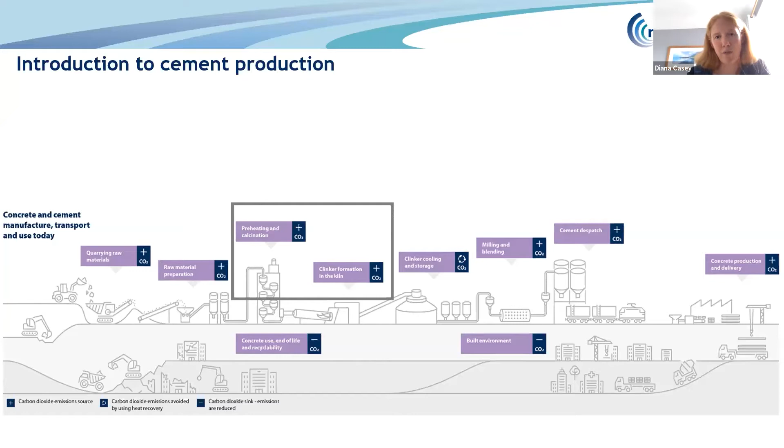The calciner and the kiln are where the majority of the fuels are consumed and where the majority of carbon dioxide emissions are produced. In cement production, 30% of the emissions arise from the combustion of fuels, with the remaining 70% coming from the breakdown of the calcium carbonate or limestone raw materials.

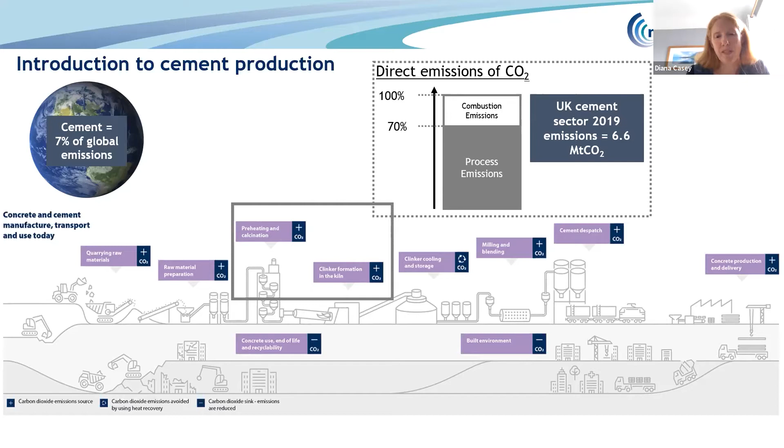Now, you often hear that globally, the cement sector contributes 7% of emissions. However, at UK level, cement production contributes just 1.5% to emissions. I'm going to come on to why that is in a bit.

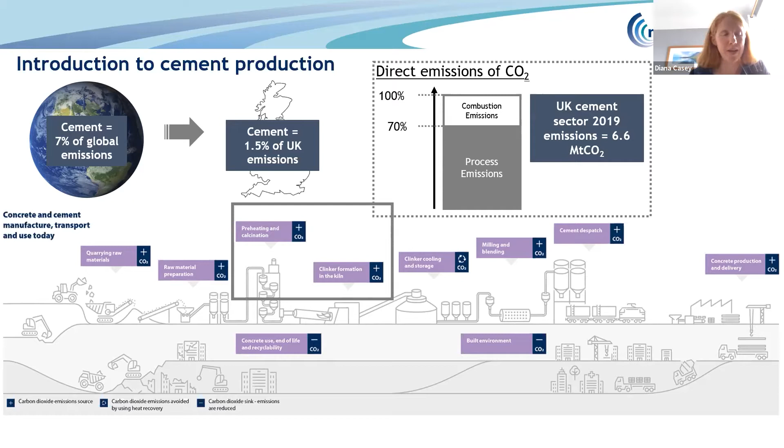Traditionally, cement manufacturers relied on coal to reach the volcanic temperatures required. However, multi-million-pound investments have been made by UK manufacturers to switch away from coal. In 2020, 47% of the thermal input to UK kilns was provided by waste-derived fuels, and this totaled 600,000 tonnes of waste. So across the sector, we use around 14 different fuels now, and I've listed the main ones here.

So we still do use a few fossil fuels - coal, petcoke, gas oil, and natural gas. But then we've got some waste-derived fossil fuels in the form of waste solvents and plastics. And then we've got waste-derived 100% biomass and part biomass fuels. So tyres and refuse-derived fuel are kind of part biomass fuels. And then we've got sludges and wood and meat and bone meal - that's quite a small proportion now, which is 100% biomass.

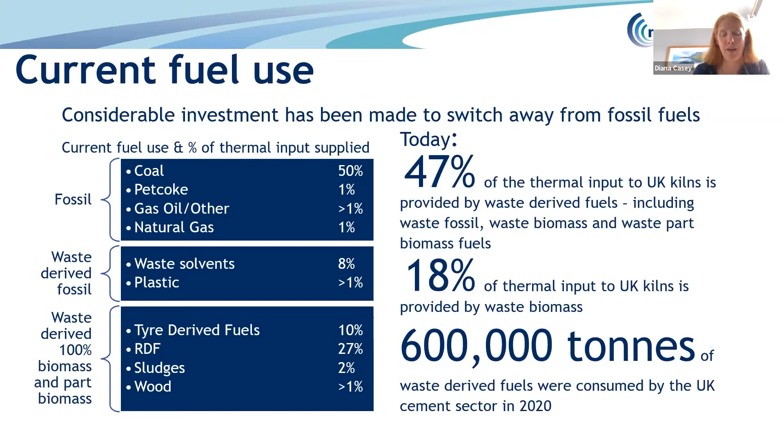Now, a key point on the use of fuels in cement manufacture is that the ash that remains once the fuels have been combusted forms part of the mineral content of cement. In other words, it's recycled into the cement product and doesn't form a waste residue that you have to dispose of after. This makes cement co-processing, as we call it, distinct from other combustion processes like power generation, energy from waste, incineration and biomass boilers.

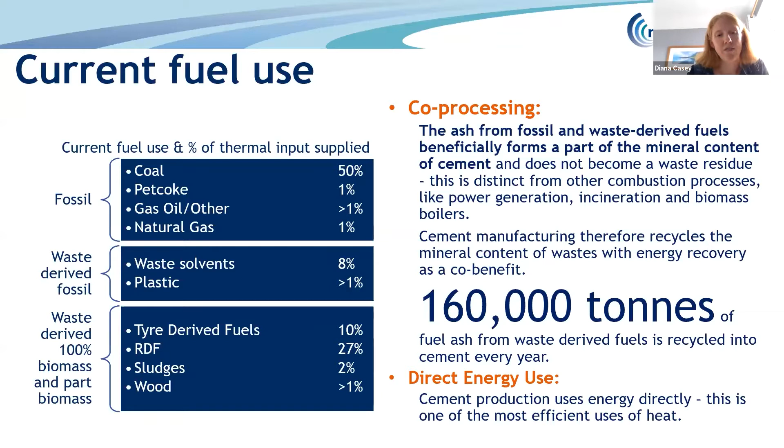And it's also important when we start looking at fuel switching, because the mineral content of the fuels reduces the raw material requirement, and changes in the fuel mix can impact the quality of that clinker because the ash is remaining in the product. Each year, around 160,000 tonnes of fuel ash is recycled into cement.

So that's a bit of background to MPA and cement manufacture. Now I'm going to move on to look a bit at decarbonisation ambition. For some time, the UK has been a step ahead of other nations in terms of decarbonisation ambition.

In 2008, the UK became the first country to legislate for a carbon reduction target through the Climate Change Act. The target set at the time was an 80% reduction by 2050 on 1990 levels. In 2013, MPA published a strategy setting out how the cement sector could meet that 80% ambition.

Today, the UK's climate ambition is net zero, to be net zero by 2050. This is consistent with the temperature target set in the Paris Agreement to limit global warming to well below 2 degrees and preferably to 1.5 degrees Celsius compared to pre-industrial levels.

To get the UK on the net zero trajectory, the Climate Change Committee advised that UK greenhouse gas emissions reduction needs to be strengthened to a 78% reduction by 2035 from the 1990 baseline. In other words, they're saying that to get to net zero by 2050, we need to be at least at a 78% reduction by 2035.

So at the national level, we know where we're heading. As we approach COP26, there will be further announcements enabling the net zero transition. This has already started with publication of the 10-point plan, the energy white paper, the industrial decarbonisation strategy, the Treasury net zero review, and we're waiting on several others as well. So yeah, there's quite a lot going on.

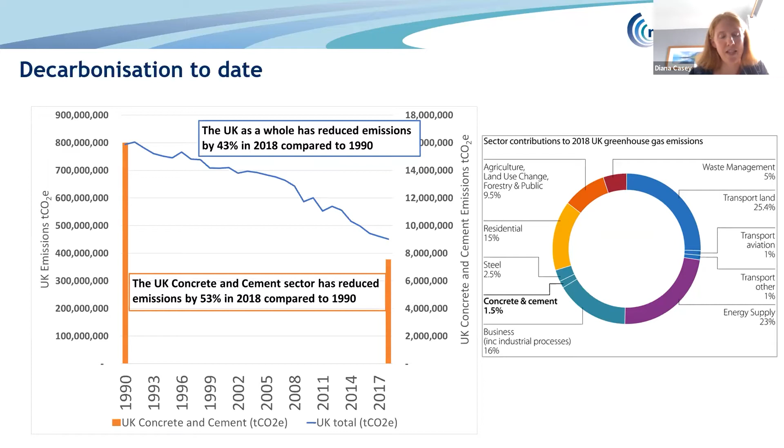This roadmap represents quite a significant milestone for the cement and concrete sector, as it clearly sets out how we can contribute and go beyond net zero by 2050. But more importantly, almost, it sets out what is needed to get us there, not just from government, but also from the industry itself and from other stakeholders.

I guess the only thing here is it's quite important to recognise that this is just one possible route to get to net zero. As some technologies develop, we might learn more about their potential contribution. And it might be that other things come along, or that electricity becomes so expensive, for example, that electrification is completely out of the picture, and we do something different. But this is one credible route to show we can get there.

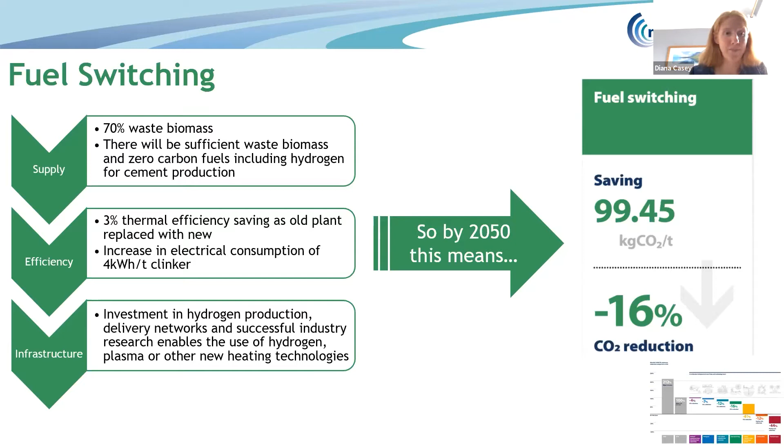Back in 2019, we successfully applied for around £250,000 of funding from the Department for Business, Energy and Industrial Strategy, or BEIS, to undertake a desktop feasibility study into fuel switching in cement manufacture. Now, it wasn't just an MPA study, there were some other partners involved in the work. These were CINAR and VDZ, and of course, the funding came from BEIS.

MPA's key role was to project manage the study, and we contributed technical and commercial oversight, provided UK-specific data, interpreted some of the results, and summarised the outcomes and communicated those results to the UK cement manufacturers and the concrete supply chain.

CINAR were quite important. They developed a unique computational tool known as PKD-MICFD - Process Knowledge-Driven Mineral Interactive Computational Fluid Dynamics. I'll probably just refer to it as CFD modelling, as that's the easiest way to describe it.

Basically, it's a tool that can track and monitor the progress of combustion and its location for not only multiple fuels at the same time, but for as many size fractions of any fuel particles as you want, and how they interact with the raw material feed. In other words, it very cleverly models what happens in a cement plant. I'm going to show you some of the results it provided for this project in a minute.

VDZ is the German Cement Association. It's a little bit like MPA, but it has quite a renowned and internationally acknowledged scientific institution to it. They've got considerable research capabilities and provide services to cement producers across the world. In this project, VDZ contributed their expertise on the cement process. They undertook things like the literature review and helped interpret some of the modelling. They also did some of the techno-economic analysis for the project.

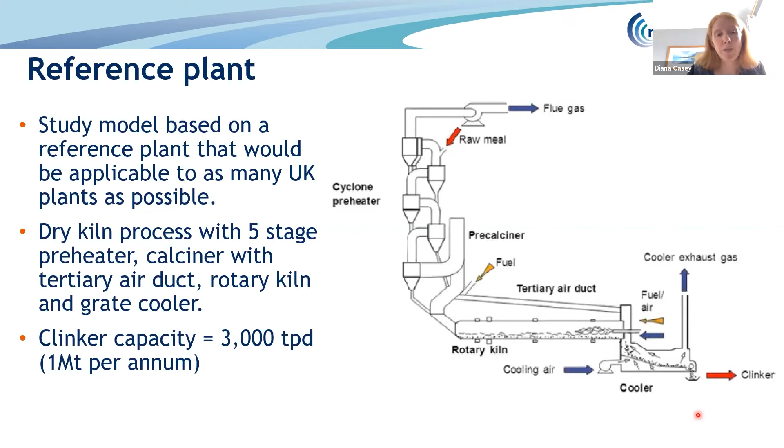It was chosen as a plant with a size or capacity of 3,000 tonnes per day of clinker, which equates to around about 1 million tonnes per year.

Still on the reference plant, this image shows the geometry of the main burner used. The kiln is assumed to be 57 metres long with a radius of 3.64 metres. The burner is a multi-channel burner, which essentially means you can use it to fire different fuels into the kiln. There's lots of technical things it does as well that I don't fully understand, relating to how the air swirls to make sure the fuels burn efficiently. I'm not even going to pretend to understand - it's very complicated. It helps those fuels burn efficiently and in the way required for clinker production.

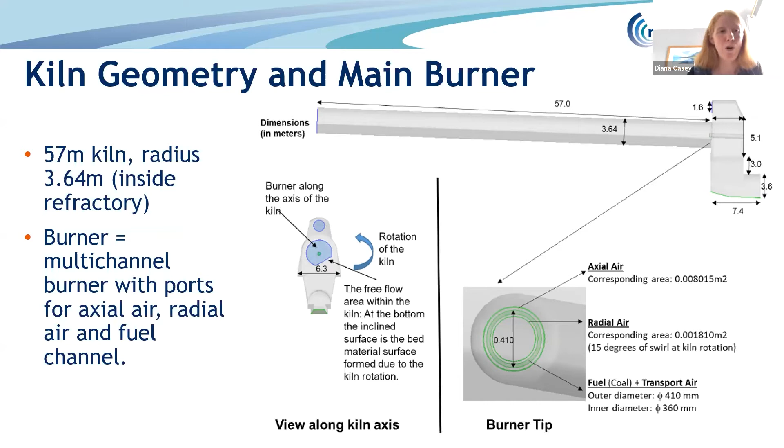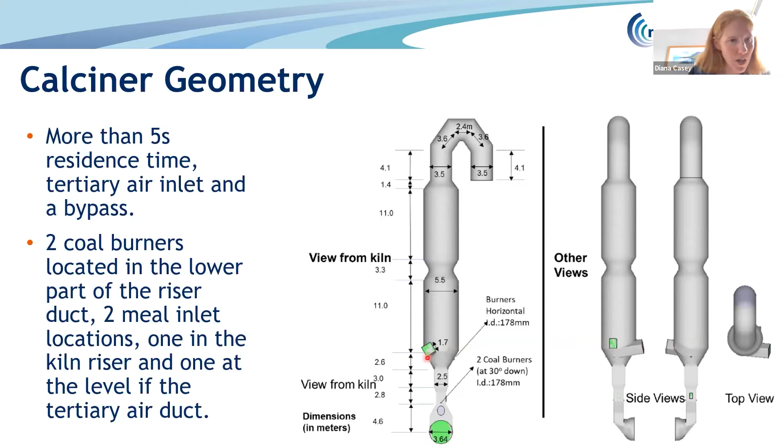And this is the calciner. The residence time, or the length of time the material remains in there - either combusting in the case of the fuel or calcining in the case of the raw meal - is more than 5 seconds. The tertiary air inlet is this square green patch here, which is quite important, I'll come on to why in a bit. There are various places you can input the fuel, and there are 2 meal inlet locations, which are down here somewhere, I think.

In terms of fuel selection, the project team used experience of the manufacturing process, along with knowledge of fuel availability, to propose a fuel mix of 70% biomass, 20% hydrogen and 10% plasma.

Plasma energy is a complete unknown for cement manufacture, and therefore presents a more challenging technology. As a result, it was selected to contribute a smaller fraction of the heat required, particularly in the calciner, and several different options for its use were proposed. Plasma is used in things like waste treatment, so we knew it's possible to use it, but it's never been used in a cement environment, which is quite alkaline and quite dusty. So we don't know how the plasma burners themselves could withstand that. It was quite an interesting thing to propose.

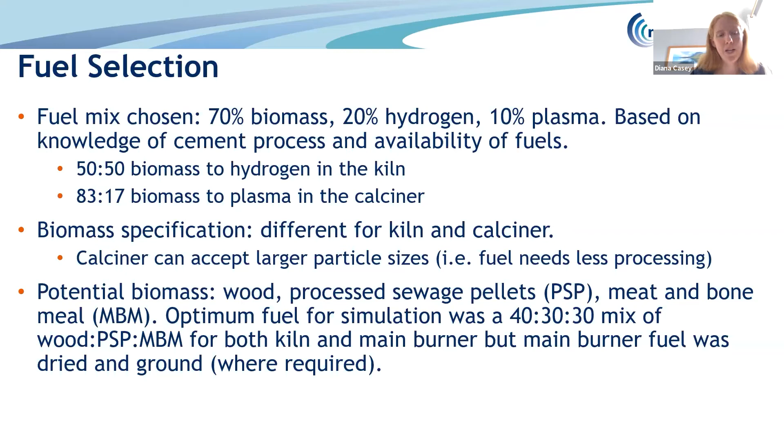For the biomass, fuels with different physical properties were chosen for firing at the kiln and for the calciner. The reason for this difference is that the calciner is able to accept larger particle sizes or chips that require less processing effort, making them cheaper and easier to access. The biomass chosen was a 40-30-30 mix of wood, processed sewage pellets and meat and bone meal. That mix was the same for the calciner and the main burner, but the fuel for the main burner was further dried and ground before use.

This diagram shows different scenarios that were modelled. For both the kiln and the calciner, there was a baseline scenario using 100% coal. For the kiln, there was just one scenario: a 50% hydrogen, 50% biomass mix. For the calciner, we used a ratio of 83% biomass to 17% plasma, but the unknown quantity of that plasma meant that 3 different options were put forward for how it was used to inject heat into the calciner.

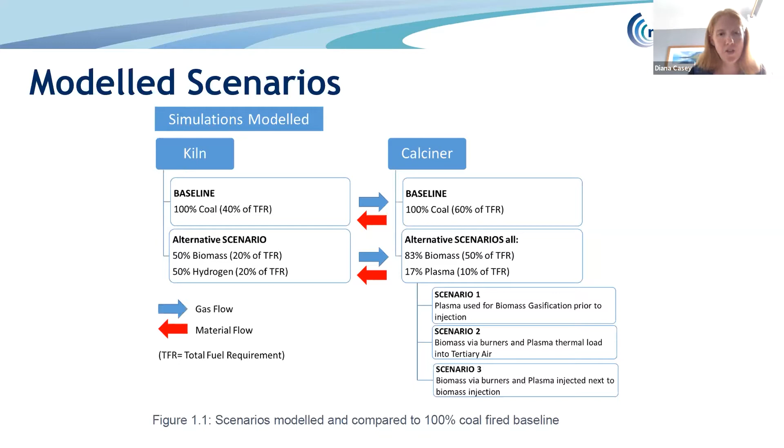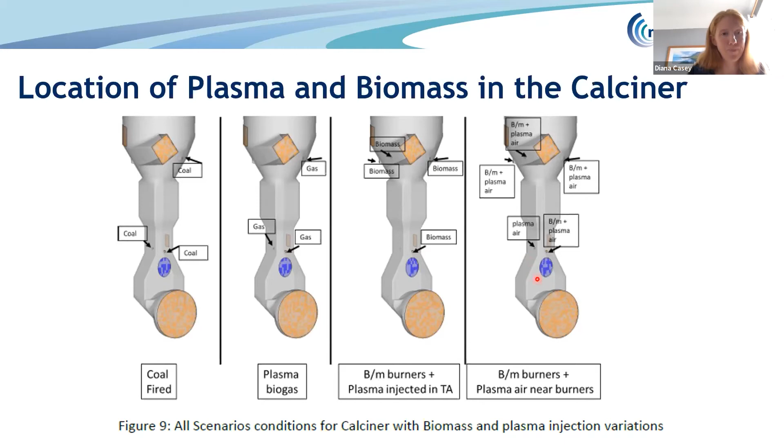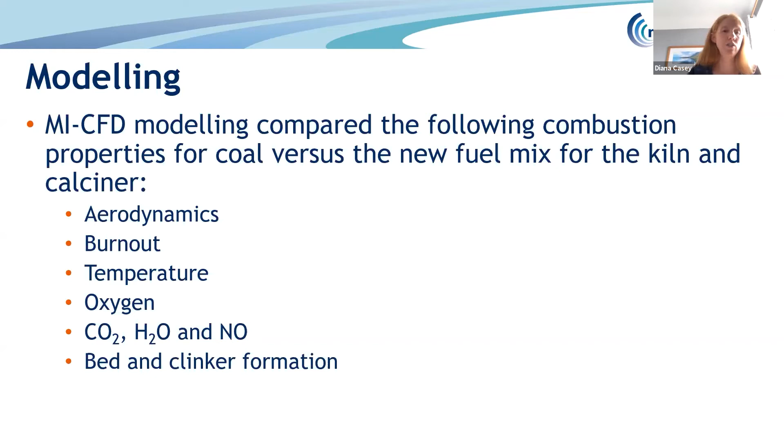The CFD modelling looked at a number of properties, including aerodynamics, burnout of the fuel, the temperatures reached, oxygen content, carbon dioxide emitted, water, NOx, and bed and clinker formation. I'm not going to present results on every single one, otherwise we might be here all afternoon, but I've picked a few just to show what the modelling does, which I think is quite interesting, along with some of the interesting results, to give a bit of an overview.

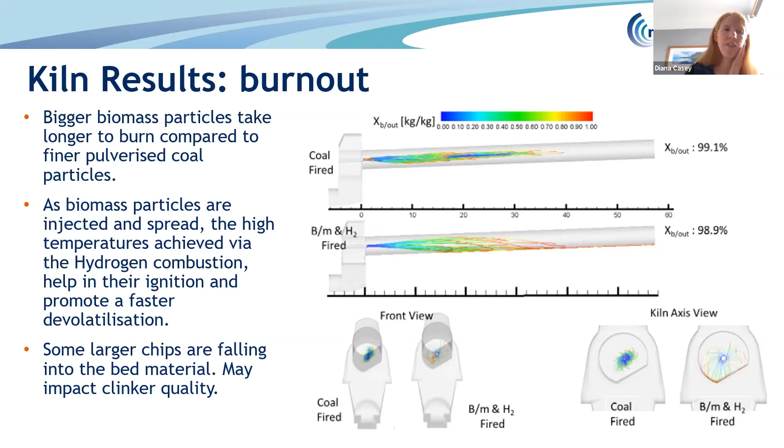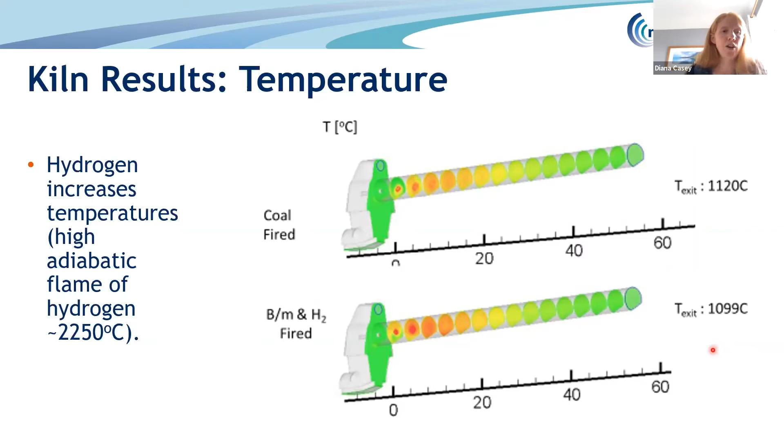These images are now looking at the difference in temperature for the two situations. The red sections are the higher temperature. You can see in this bottom diagram with the hydrogen, you've got a lot more red at this end of where the flame is, showing that short, sharp hydrogen flame compared to coal, where the heat spreads and disperses a bit more. You can also tell the flame's a bit shorter because the exit temperature for the hydrogen case is lower than for coal - 1099 degrees C for hydrogen versus 1120 for coal.

Now, oxides of nitrogen or NOx are another interesting one, with significantly different results for the hydrogen and biomass case compared to coal. The use of biomass, which naturally contains significantly more nitrogen than coal, increases the production of NOx. The blue end of the scale shows very low NOx production, whereas the red and yellow end shows a lot more NOx. But as well as the biomass, the higher temperature of the hydrogen generates thermal NOx as well, so we've got this massive increase. The diagrams look really different for this.

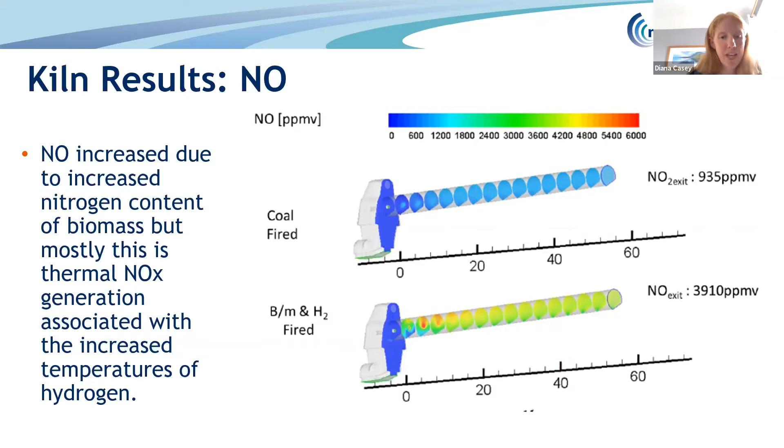So that's just a few of the results for the kiln. I'm now just going to go on to look at some of the Calciner results.

This one's looking at the burnout of the fuels first of all, showing the residence time of the fuel in the Calciner. Again, this image on the left is the coal base case, and we've got two on the right showing scenario 2 and scenario 3. Scenario 1 isn't shown here because we're looking at the burnout of the fuel particles, and scenario 1 didn't involve injecting any solid fuel into the calciner - it was just using the plasma energy to gasify the biomass and then inject the gas. So there was no result for scenario 1 in this case.

So the fuel switch images look quite different to the coal base case. The coloured trajectories show how long it takes for particles to leave the calciner. Biomass has quite a high residence time, which improves the burnout of the particles. And we found that injecting the plasma near the burners leads to improved combustion - you can see the lines are a lot more blue, showing a shorter residence time here than they are here.

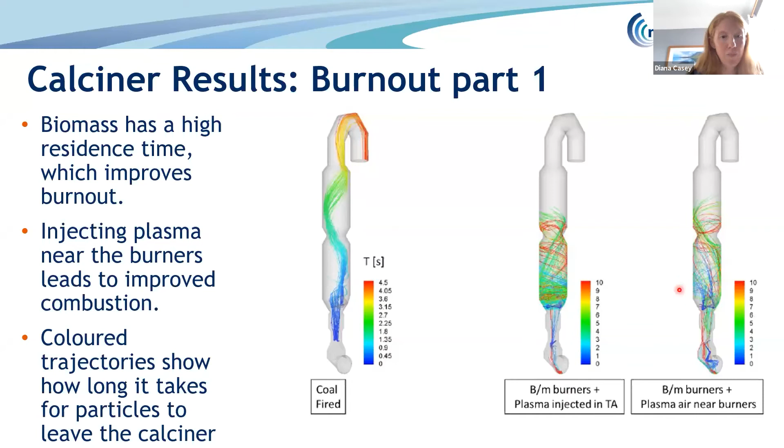This time, the images are showing the calcination of the raw meal. The blue end of the scale shows the start of calcination, and the red shows the fully calcined material. This time, all three fuel switch scenarios are shown because they've all got the raw materials going into the calciner. In this case, scenario 1, using the biogas, leads to greater calcination - you can see there's a lot more red in there than the other scenarios. Scenario 3 had the lowest calcination level.

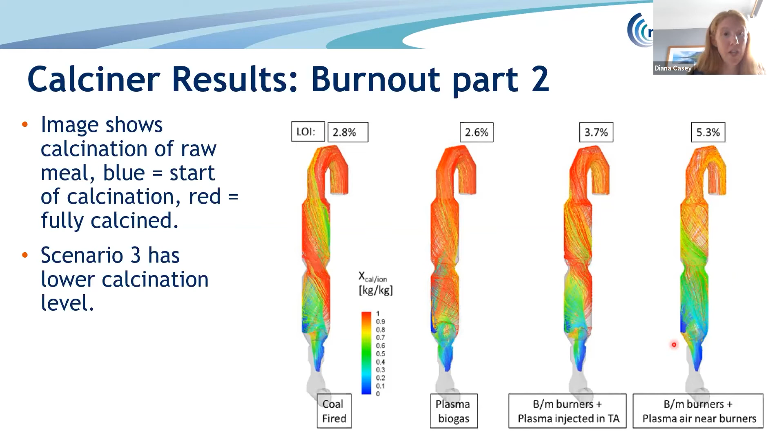This image shows the temperature within the calciner compared to the coal base case. The fuel switch scenarios all developed some hotspots within the calciner, shown in red. It's not so easy to see, but in the coal base case we don't get any really red - there's a little bit around here. But in scenario 1 we have a bit here, and scenario 2 has quite a few hotspots.

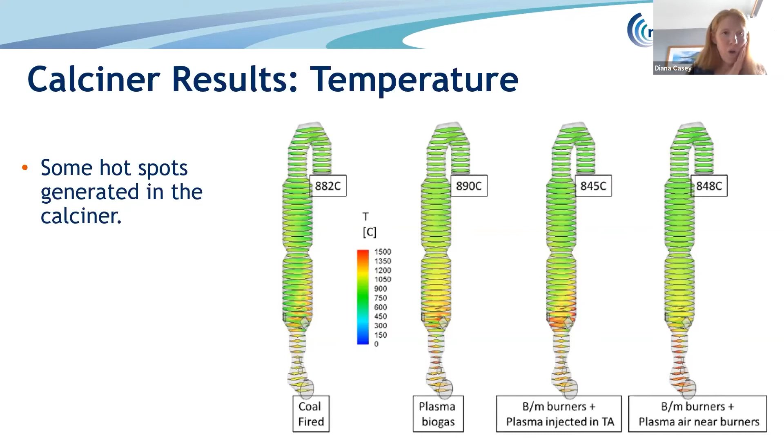And scenario 3, it's quite red down here, although it is quite awkward to see. That's not necessarily something we want, so we need to do some optimizing to try and reduce those hotspots.

So just in terms of an overview of what those results were showing, we found that existing kilns and calciners can be adapted to operate with zero carbon fuels. The simulations indicate there's no negative impact on the clinker quality, the kiln stability, or any build-up issues within the kilns.

However, some kiln and plasma burner developments are needed to refine things, just to make sure we don't unnecessarily wear out refractories and things like that. The flame high temperature in the kiln can be tolerated with some optimization of the burner, both in terms of its design, how it's injecting that fuel in, but also its location, just to try and fire the particles at a slightly different angle so they don't quite reach into the bed.

Now, the best locations for the plasma burners going into the calciner may be limited by space on site, and using multiple burners might cause infrastructural difficulties because of increased power demand. And the choice of plasma gas—ambient air, steam, CO2, argon, or hydrogen—still needs to be determined. The efficiency and ability to operate that plasma burner in a dusty calciner environment needs further research.

So the hotspots in the calciner must be reduced. The location of the plasma injection in relation to the hot raw meal coming in and the biomass inlets needs further investigation to improve that heat absorption and make sure the heat's going into the raw meal and not into the side of the calciner.

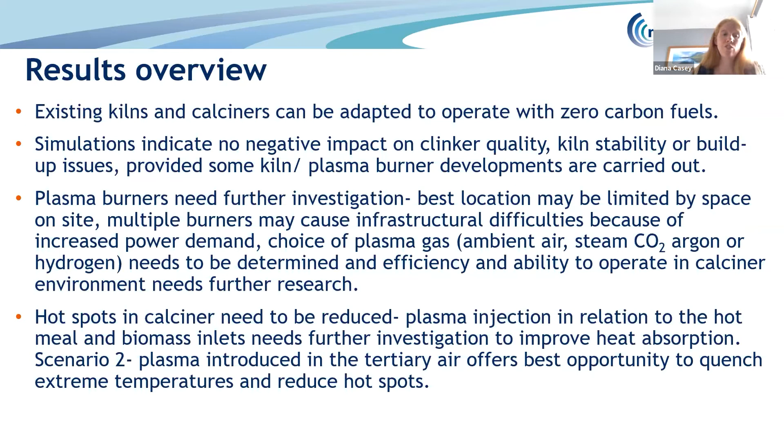And scenario 2, where the plasma is introduced into the tertiary air, appears from the modelling to offer the best opportunity to quench some of those extreme temperatures and reduce those hotspots.

So following that feasibility study, we successfully applied for a further £3.2 million to demonstrate fuel switching at 2 plants. These are physical demonstrations at 2 cement plants. The work has been delayed due to COVID, but the trials are due to take place in the next few weeks, starting in September, and the whole project is due to be completed in March next year.

So the demonstrations are actually looking at putting biomass and hydrogen in the kiln at Ribblesdale, and plasma and biomass in the calciner at the Tunstead Works in Derbyshire.

So far, the preparatory work for these physical demonstrations has raised quite a few issues which we weren't necessarily expecting. First of all, we were looking at using 1 megawatt plasma torches. They are really difficult to source and extremely expensive, and they tend to be much smaller powered units. So what we're having to do for the demonstration is use a much smaller torch.

And because it's not going to be inputting the kind of heat demand that we were hoping for, we're really using it now to investigate the ability of the torch to work in that kind of calciner environment, if it can withstand the dusty conditions without the anodes and cathodes deteriorating so quickly that we have to continually replace it.

Secondly, we found that a small trial of only a few days would have consumed more than the entire UK supply of hydrogen, which was a bit of a shock—to me anyway, because hydrogen's talked about a lot, and this was just a tiny trial for a few days at one cement plant. So to find out that the hydrogen just wasn't really there was a bit of a surprise. We had to scale that back too, but we should still get some very useful results from that part of the trial.

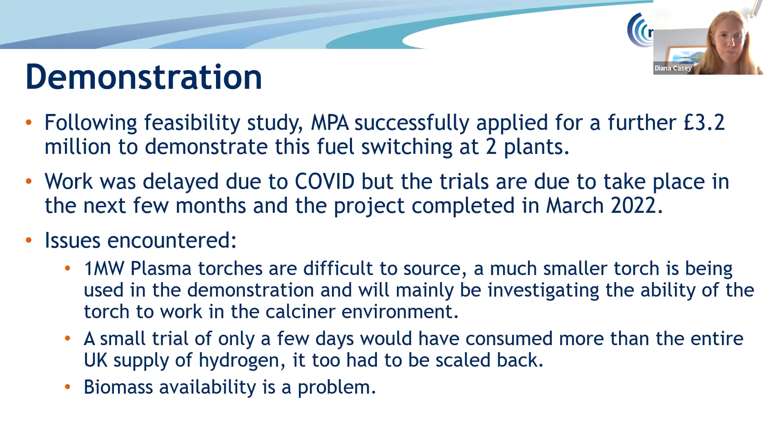So although we're still to undertake those physical demonstrations, we're already aware of several enablers that will be required before fuel switching to this kind of biomass, hydrogen, plasma or electrification will become a commercial reality. The sector needs support to access waste biomass fuels, equivalent to that received by other consumers. The production of hydrogen via low or zero carbon means is required at a cost that won't affect the competitiveness of the sector, and in quantities that make its use viable.

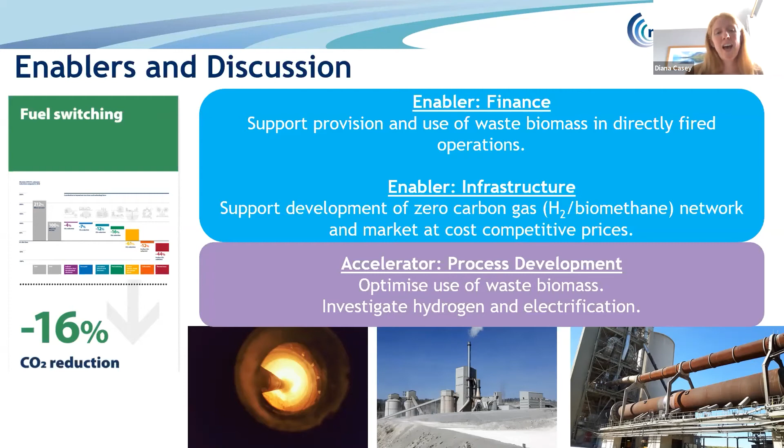So there's still some way to go, but these studies have been some really important first steps. We know there's more government funding for fuel switching becoming available, and it'd be great if we can overcome some of these hurdles and barriers identified in this work. So I hope that's been an interesting overview, and I'm happy to try and answer any questions.

I'll start off with one then. I must admit I was quite interested in two points. I was wondering where the hydrogen was expected to be coming from, that was the first point, and perhaps you could tell us where that's sourced and how that comes about. And on the biomass side, you talked about the shortage of biomass. Are you talking about RDF? Because can that be used in any way in the kilns? We export literally millions of tons of that to Europe, which seems crazy when we can use it on our own shores rather than sending it overseas, increasing its carbon footprint by having to transport it. Just start those as a kick-off, if you like.

Yeah, no, thanks, Steve. So the hydrogen at the moment is coming from non-low or zero carbon options, because it's just not produced at the moment in the UK. I always forget the colour scheme, I think it's grey, and then blue is a different one and green is a different one. So I think it's the grey one. But I think we had to go with what was available, and it's a good test of whether we can actually use the hydrogen in the kiln. The government are doing quite a lot at the moment in looking at how to set up business models to make sure we have the hydrogen production, either steam methane reformation with CCUS, so carbon capture, or using electrolysis, so using electricity, or renewable electricity, to produce the hydrogen.